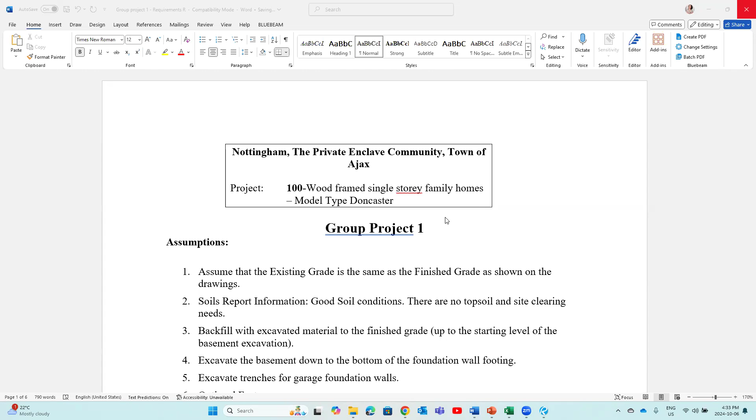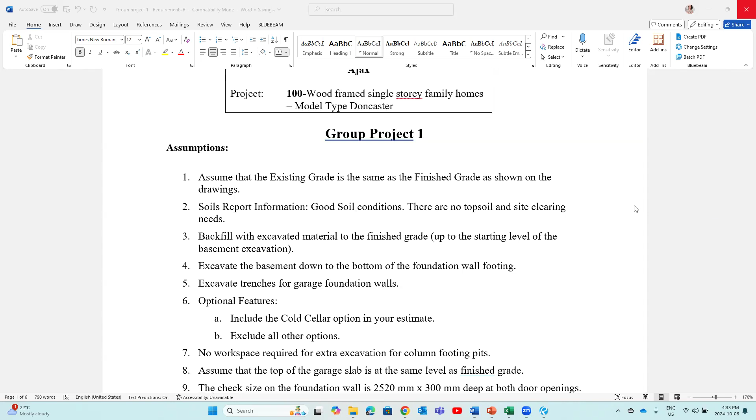The first thing you need to do is read the requirements for this group project number 1. If you go through the requirements, I have a lot of assumptions, extra information or additional information I give to you other than the set of drawings and construction notes. Also in the requirements for the project, I also give you the recap as well.

So those are the items you need to calculate quantities for. For example, excavation, right? We have 9 items you need to get the quantities for: excavation basement, trench excavation, excavate trench for garage step footings, then backfill, or whatever.

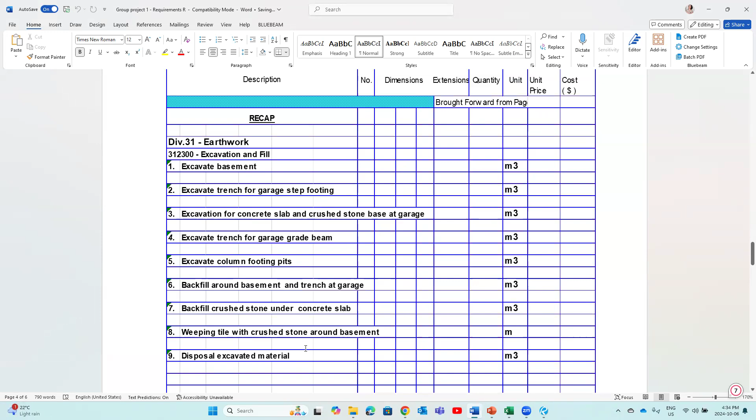So after you go through these requirements, the next thing you need to do is open the drawings. In this case, we don't have a separate specification, but we do have construction notes with the drawings. I believe you're already familiar with this Doncaster project. So the first thing you need to do is read the construction notes first.

You go through the construction notes and highlight the information you need for excavation. For example, those notes which are highlighted are related to the excavation work. Also, you need to highlight the information you need.

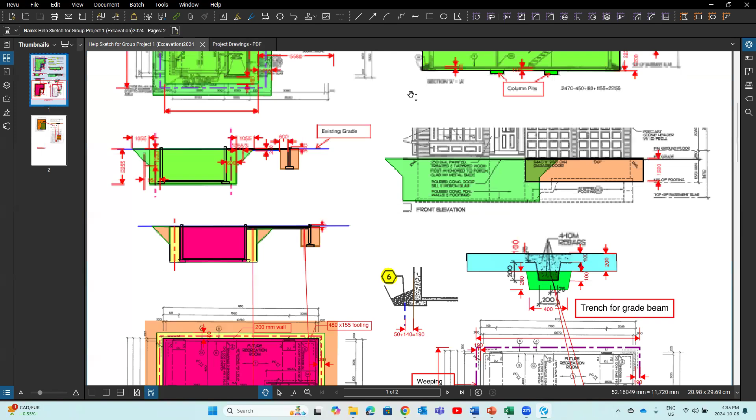For example, under construction notes, I read those notes and I highlight the size of the column footing, the size of the foundation wall, the size of the foundation footing underneath the foundation wall, and the thickness of the slab in the basement.

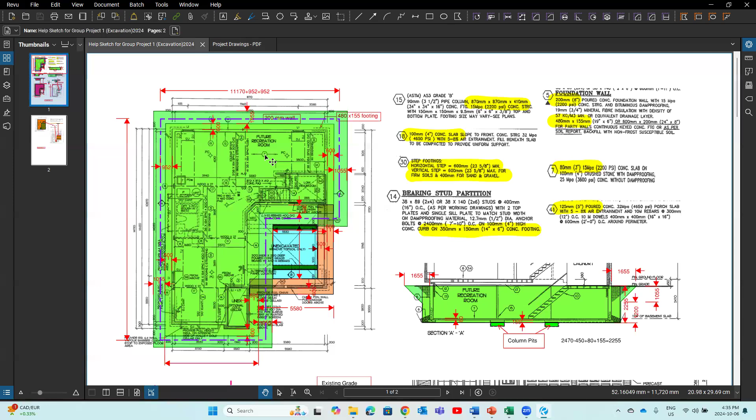That's number 7. You see number 7 here in the notes. See that, right? That's number 7 there. So that means this basement slab is 80 millimeter, the thickness of the concrete slab.

And this 18, note 18 is for 100 millimeter concrete slab. If you look at the drawing, the first floor plan, you see this note number 18. That means the thickness of the concrete slab in the garage is 100 millimeter. So that's the way how you read the construction notes.

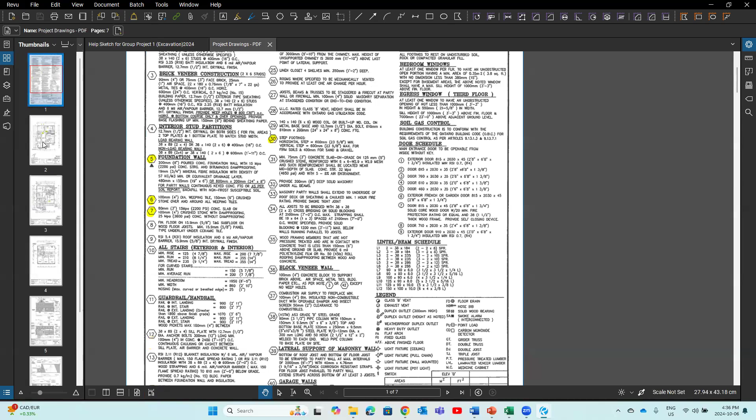And also you put the notes, you can highlight the information. Sometimes you can also transfer the information to the drawings. I would say, okay, under drawings, I'm going to write, for example here, the thickness of the wall. This thickness of wall here is 200 millimeter. I would put this information under drawings.

So next time I don't need to go back to read my notes. I'll write down my footing size, 480 by 155, that's this footing. I can use a different color as well. Here, side and front, and here, you see that's my footing. I want to say footing, I'll say foundation footing. The footing is this.

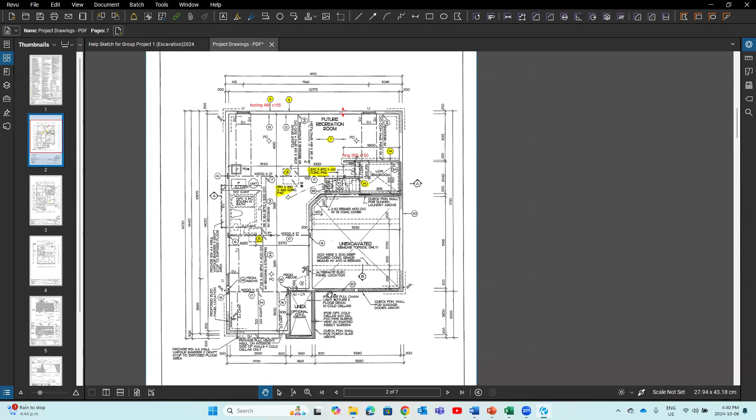That also means we need to dig a trench along this wall. A big basement excavation, dig a big hole for the basement, and for this wall, the garage wall, we are going to excavate a trench. It's very similar to the example I gave you in week 4. If you don't know how to do it, look at my example from week 4. It has a very detailed explanation of how we do the excavation in this kind of situation.

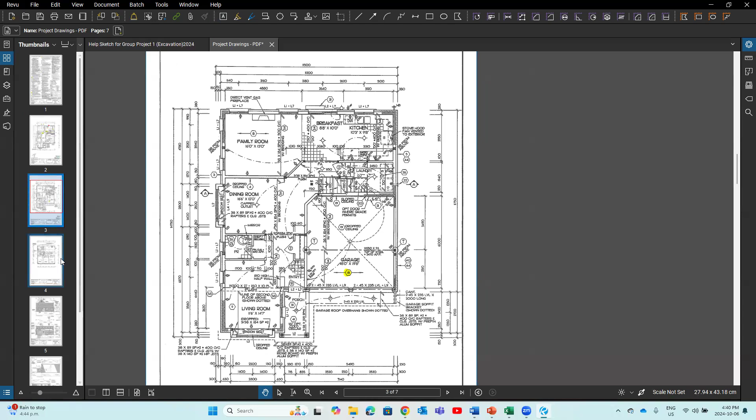So after we read this foundation plan, we need to go to the other floor plans, first floor, second floor, and then look at the elevation. When we look at the elevations for excavation, we pay more attention to the foundation.

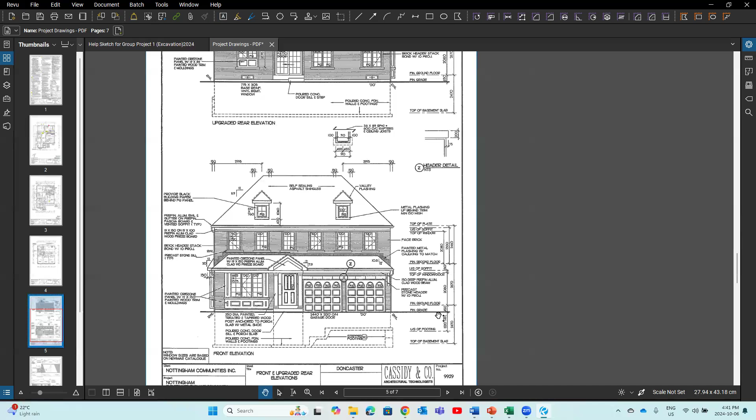If you look at this elevation, you'll see we have step footings here, two steps down. We should also see the notes for step footing, that's construction note number 30. And we should see the dimension from the finished ground floor to the top of the basement slab.

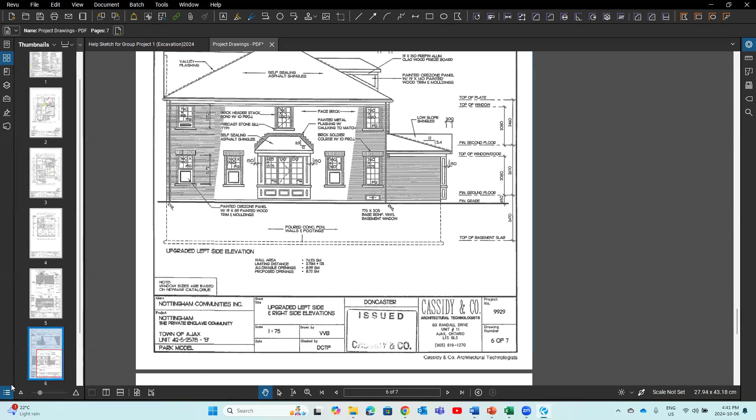After we go through this elevation, we should go to the cross section as well. On the cross section, we see the dimensions for the foundation wall, the height of the foundation wall, and we can refer to the notes for the size of the foundation wall and footing, column footing size, partition wall footing size. At this stage, we should know all the information related to them.

So after reading this, what you need to try to do is, in your mind, picture this in 3D. I'll give you some ideas about the 3D modeling to help you understand the 2D drawings. So after understanding the drawings, we try to visualize it in 3D.

So under the foundation plan, we see the windows, we'll say basement windows. That means when we build this foundation wall, we need to cut a recess, make a recess under the concrete foundation wall.

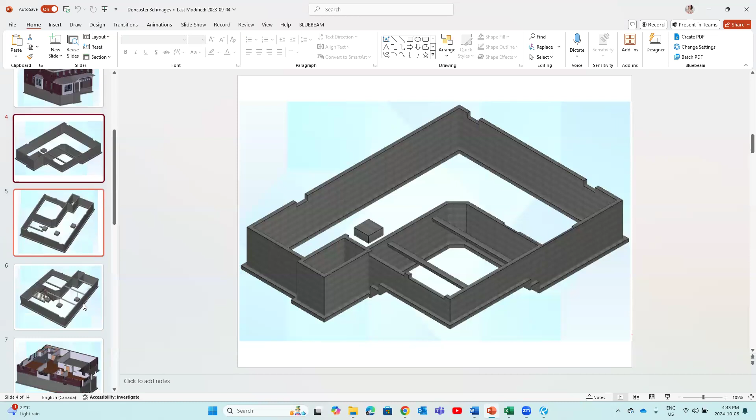Now you see this foundation wall along the garage. This is the garage, there's a foundation wall along it. See, this foundation wall is shorter than the basement foundation. And also we can see we have partition wall footing, we have 3 column footings, we have grade beams there.

So that means when we excavate the basement, the shape we are going to excavate is this, that's a big hole we need to dig. Then we dig a trench along here, and also we need to think about column footing pits as well. So this is how you can visualize it in 3D.

So after you understand this, now we are going to draw sketches to help identify the shape of the excavation and the size of the excavation. So now we are going to look at the 2D drawing and start to draw sketches using the section drawing, the cross section.

The first thing we need to find out is where is the existing grade. You see, this is the final grade or finished grade, but we don't know where the existing grade is. We also need to know the condition, the soil type or condition of the soil.

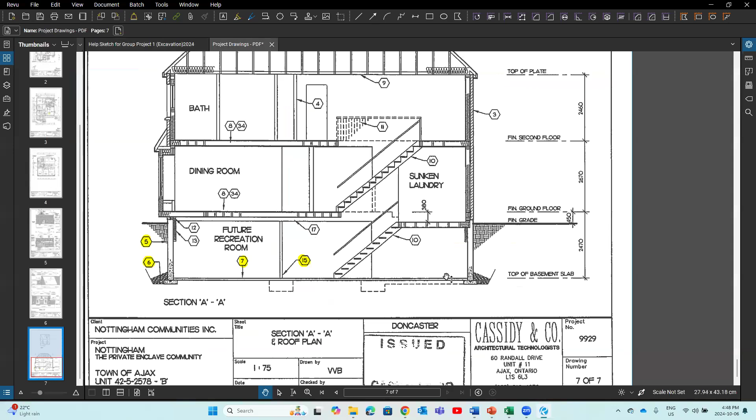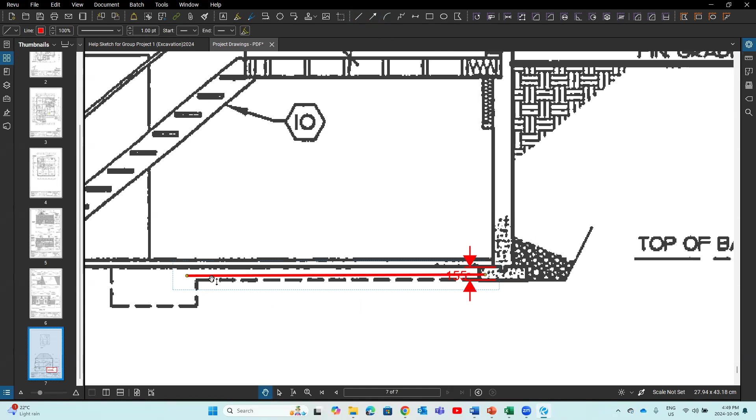That means the footing, you see, this footing size we know is 155. And the gravel here, if I draw that line, that would be around here. That's the gravel, that's the bottom of the gravel. And this dimension from there to there is 100. So the difference is 55 millimeter.

55 millimeter. So my assumption is, okay, let's excavate all the way to the bottom of the foundation wall footing, and we are going to make the thickness of the gravel from 100 millimeter to 155. That's my assumption. As a contractor, in real life, I'm going to decide this is the way I'm going to do the excavation.

I excavate the whole basement to the bottom of the footing. And the thickness of the gravel, instead of 100 millimeter, now would be 155. That is my assumption.

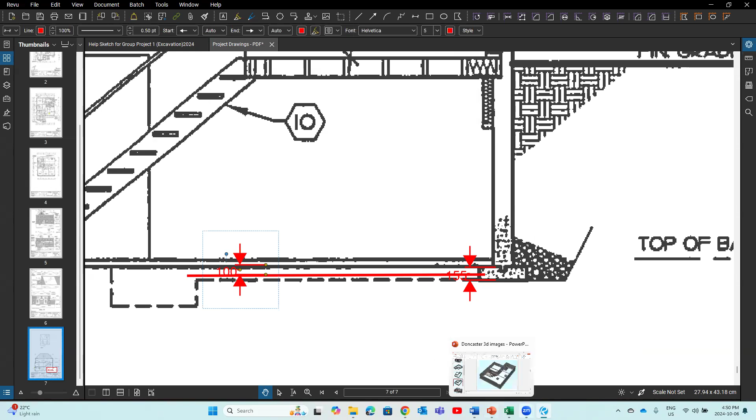So if you look at the notes, this assumption here, you see number 11. I said, assume there is a 155 millimeter thick crushed stone base under basement slab. Please replace 100 millimeter crushed stone with 155 millimeter crushed stone in construction note 7.

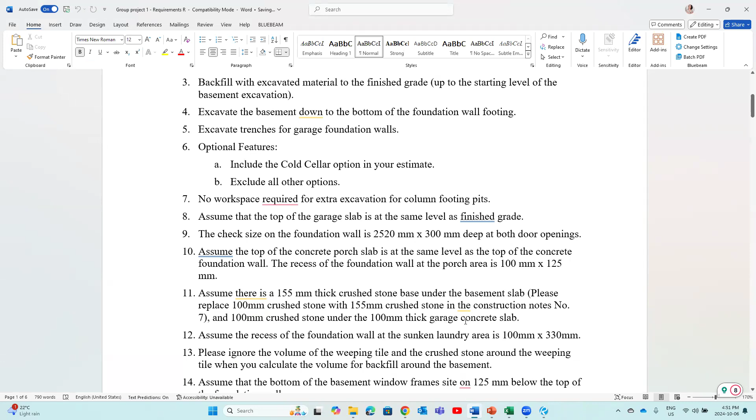And we also say, assume there is 100 millimeter crushed stone under the 100 millimeter thick garage concrete slab, because note 18 didn't mention what the thickness of the granular base underneath the concrete slab in the garage is. So I add this assumption.

So those are the extra information you need to pay attention to. Just read them, you will realize that.

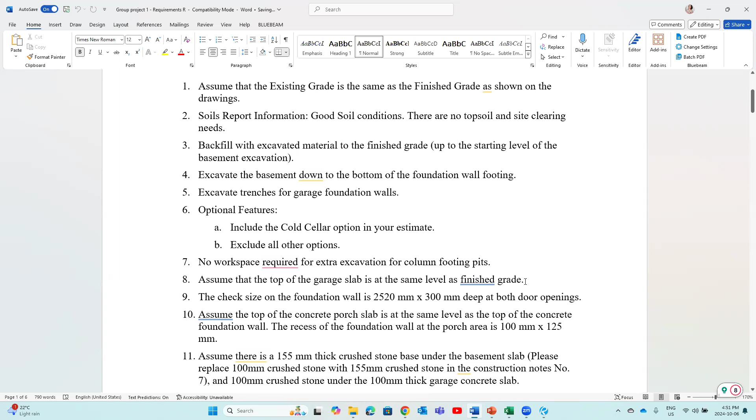Another assumption I say, pay attention to this. Assumption number 8, assume that the top of the garage slab is at the same level as the finished grade. That means the top of the garage slab is also at the same level with the existing grade. That's what you need to pay attention to.

After we know all that information, now we are going to start drawing sketches. As I said, we are going to first look at the cross section to draw a sketch. So the first line we are going to draw is where the existing grade is. We know existing grade is the same as the finished grade. So this is the existing grade, see this line. I'll make it a different color, maybe blue.

That's the existing grade. So from the existing grade, I'm going to excavate to the bottom of the foundation wall footing. So based on this, I can do my calculation and figure out what is the depth of basement excavation.

You see, I know this dimension from here, finished ground floor, to the top of the basement slab is 2470. To the existing grade, this dimension from there is 450. So I take this dimension, subtract 450, and get this dimension from there to there. After that, I need to add the thickness of the slab and the thickness of the foundation wall footing. That slab is 80 and the foundation wall footing is 155. So I get the depth of my basement excavation, 2255. That's how I get it.

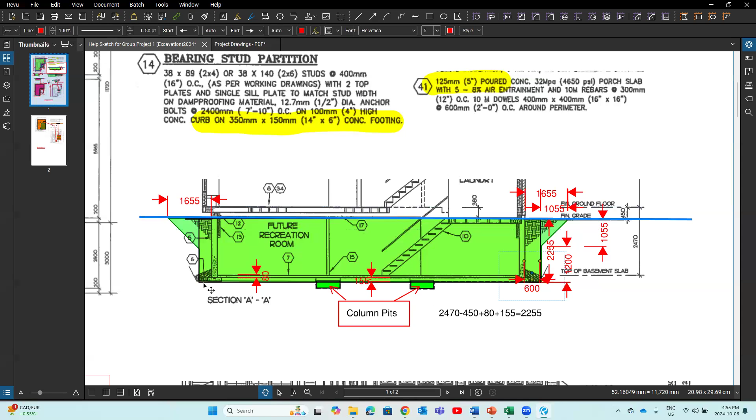We also have column footings here. That means after we excavate to the bottom of the foundation wall footing, we need to dig extra column pits for those column footings. The depth of the column pits should be the depth of the column footing, subtract 155. That will give us the depth of the column pits.

Now, how many? We can see that from the foundation plan, right? 3 of them. Of course they have different dimensions. Pay attention to the dimensions of those 3 column footings.

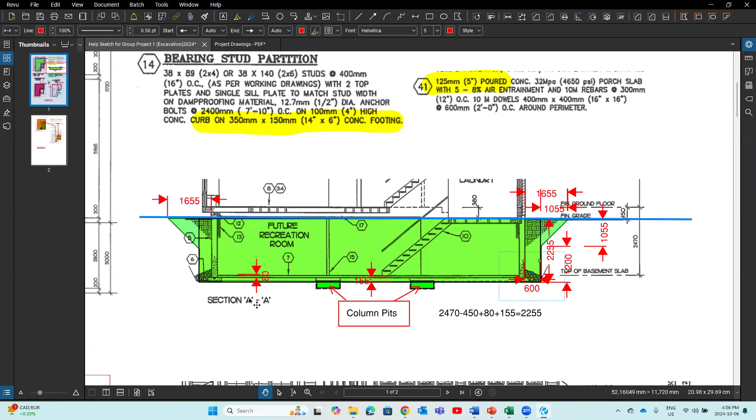After we finish this sketch, we are going to move this sketch to my foundation plan. In my example, I told you the easiest way to do the excavation is to separate the volume of the basement excavation into 2 parts. The first part, we assume we are going to cut straight down. Cut this, say, this green color.

We excavate the basement from the existing grade straight down to the bottom. Then we add the volume of this slope, which is a triangle. So if I want to draw this first part, cut it straight down from the ground, from the existing grade, that's this here. Cut it straight down like this.

The workspace, 600 millimeter, you see that's here, that's this. If I want to draw this here, this workspace, that's 600 millimeter. This is 600 millimeter from there to there.

On my foundation plan, that's this dimension here, from there to there, 600 millimeter. From outside of the foundation wall to this edge, 600 millimeter, and 600 millimeter there. So I can draw this part.

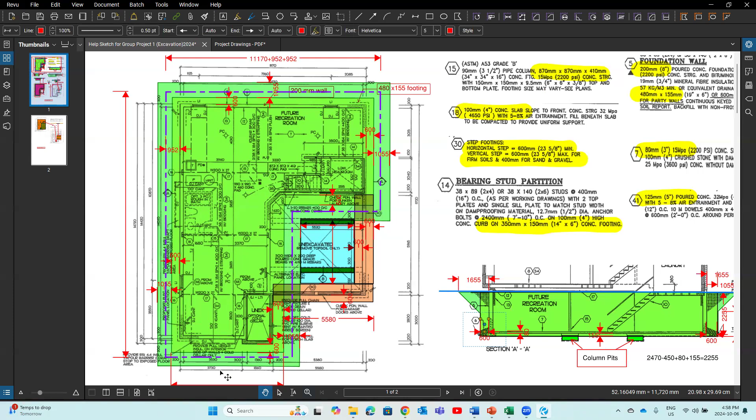So if we have a situation like this, we need to make sure we have this workspace from this foundation wall to the edge of the excavation. The back of the excavation is 600 millimeter, make sure this is 600 millimeter. Of course this part would be bigger than 600 millimeter, that's how much bigger, 300 millimeter more.

So that means this dimension, if we want to draw from here to there, that will be 900 millimeter. Pay attention to those kinds of small things. When we excavate a big basement, we use equipment, we don't want to make those setbacks, we always cut it straight.

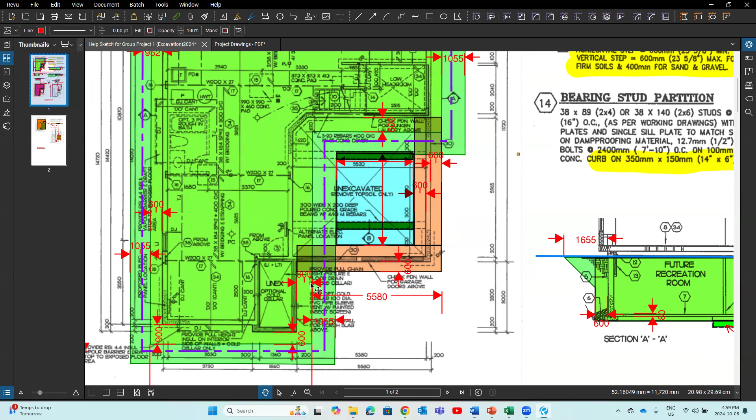So the same situation applies to this side. You see this wall here has a setback there. So we should base on this wall to decide what's the workspace, from this wall out 600 millimeter. So that's how we draw this first part of the excavation under the foundation plan.

And if we want to draw this slope, this triangle part, that's this color all the way around. Make sure you imagine this in 3D, it's all the way around, it's not only two triangles. That's what you need to visualize in your mind, it's a slope all the way around here.

Okay, if we can draw this under the foundation plan, now we can start to measure the quantities for basement excavation. Let's look at the first part here. Okay, first part.

We consider this slope the second part. First part, let's cut it straight down to the bottom of the foundation footing. So what would be the dimension for this? We want to get the area of this, based on the foundation plan. After we get the area, then we multiply by the depth, we should be able to get the volume for the first part.

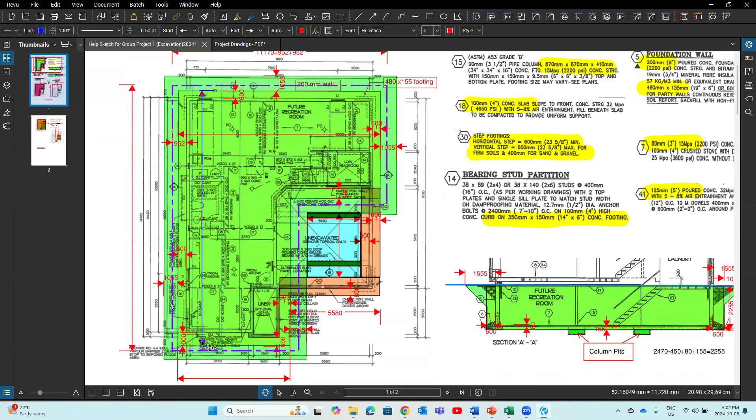So how do we get this dimension? We have this dimension here, from outside of the foundation wall to outside of the foundation wall. Take that dimension, we add 600 millimeter this side and 600 millimeter that side, we should be able to get this dimension. Same way, we can use the same method to calculate the dimension of this. That is the first part of basement excavation. Now we are going to look at the second part of the basement excavation.

If I draw the dimension here as well, this dimension is 1055. This is 600 millimeter. If I want to get the area of this triangle, I would take base, 1055, multiplied by the height, 1055, divided by 2. I get a cross-sectional area of this slope, which is the cross-sectional area of this triangle.

After I get the cross-sectional area of this triangle, which is the slope, I multiply by the length. We cannot see the length from the section drawing, but we should figure out the center line length on the foundation plan. When we talk about the length of the wall, we look at the center line - that's the length of that wall.

So same thing applies to this slope. The center line length of that slope is the length of that slope all the way around. So we are going to look at where the center line of this triangle is. If you have an engineering background you already know this - the gravity center of a triangle, from the base to this side, is 1/3 of this dimension.

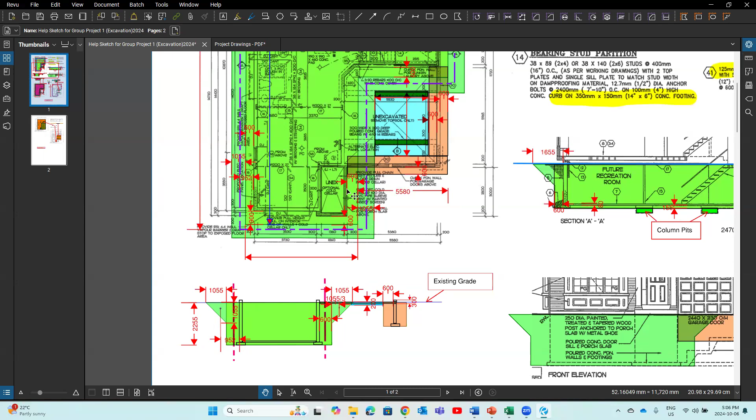If I draw this here, from there to there, that's 952. Understand that? That's this dimension here. So same thing all the way around this side, from there to there, 952, from there to there, 952.

So I can do this calculation. Same thing, I can get a dimension from there to there - take this dimension plus 952, 952 on this side. After I get these two dimensions, I can take this dimension plus this dimension, multiplied by 2. That would give me the perimeter.

The perimeter is a length, a 2D length - you need to think of it this way: you stand there, it goes all the way around, that's a travel distance, you go back to the same point.

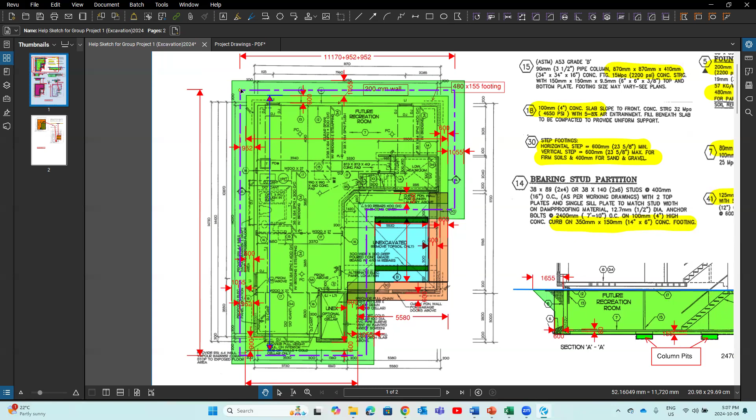After you get the length, you multiply by the cross section of this triangle, you get the volume. You add them together, you get the total volume of basement excavation.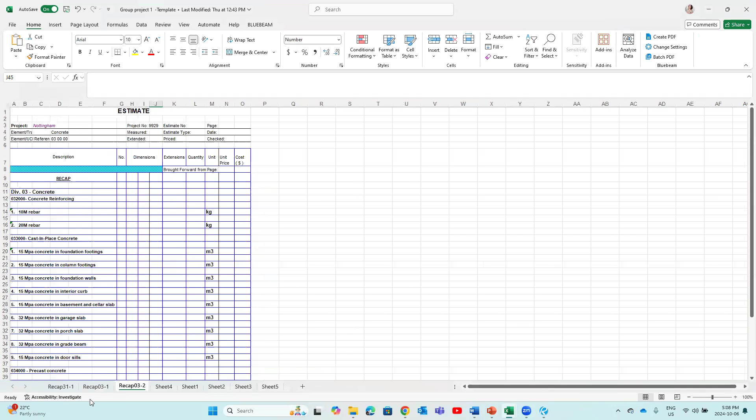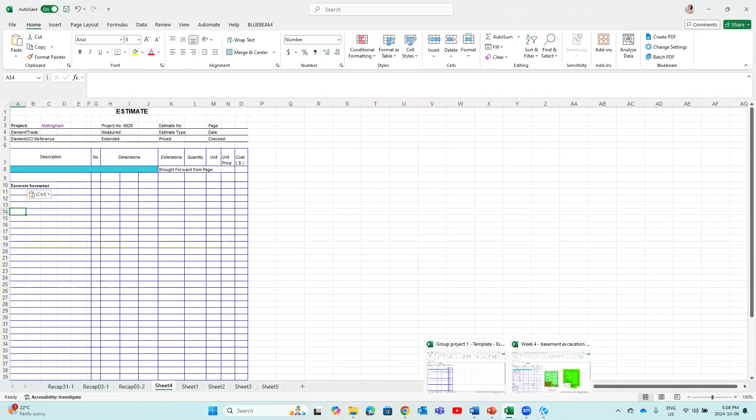So I gave you a template - this is my template, I gave you the recap. You can use this recap and template to do the calculation. You see, basement excavation, I'm going to calculate my first item. I copy this, go to my standard worksheets, paste this, basement excavation, and start to lay out my calculation.

How you lay out your calculation, use this example I give to you - it's an Excel file in week 4. You go to week 4 in D2L, you will be able to download this Excel file, and this is the way how you lay out your calculation in Excel. You can follow this - the drawing is slightly different, but the process should be the same.

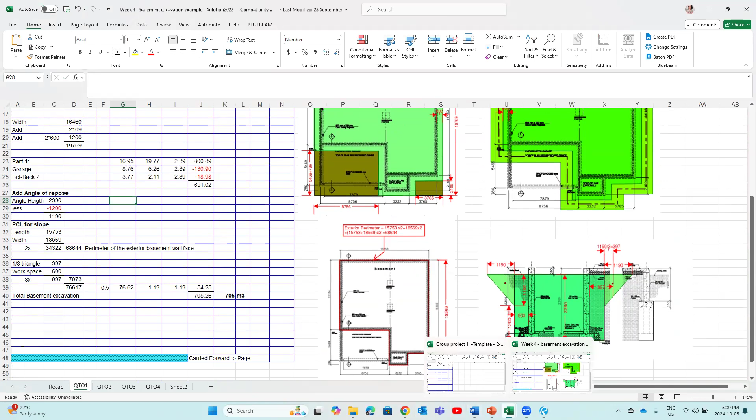That's how you start, because quite a few students asked me about this - what do we need to do. That's how you start: lay out your calculation, use the template I gave to you, and follow the example like this.

That's the first work item, basement excavation. Now we look at the second work item in the recap.

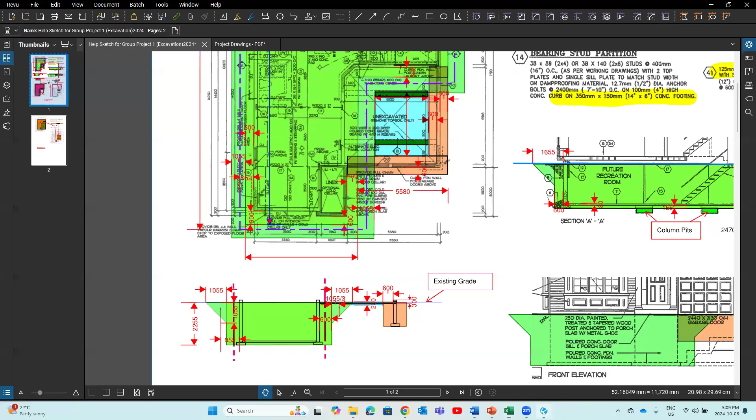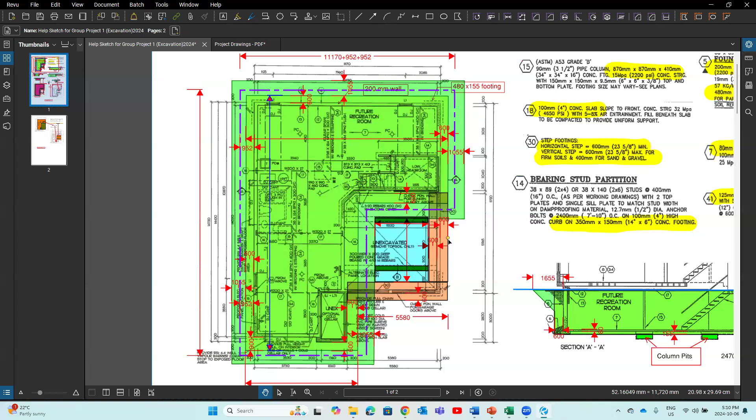Excavate trench for the garage step footings. That's this, the trench excavation. We would figure out what is the length of the trench. To simplify the calculation, we are going to use the length of the foundation wall as the length of this trench. Just figure out the dimension from there to there. Then you multiply by the width of the trench, depth of the trench. So if you look at the elevation, you should figure out what is the depth of the trench.

From the existing grade to the bottom of the footing, minimum is 1220. We are going to use this 1220, that's the depth of our trench. So I'm going to assume I'm going to excavate the trench straight like this.

We are going to ignore the step down footing, because when I excavate my basement, it's like this. Then if I calculate the trench excavation all the way to the foundation wall, take the length of the foundation wall like this, I actually double calculate the volume of this part. This volume I double calculate can balance this volume here. That's why I don't need to consider the step down footing, extra excavation to this step down footing. So that's a common practice, how we do things.

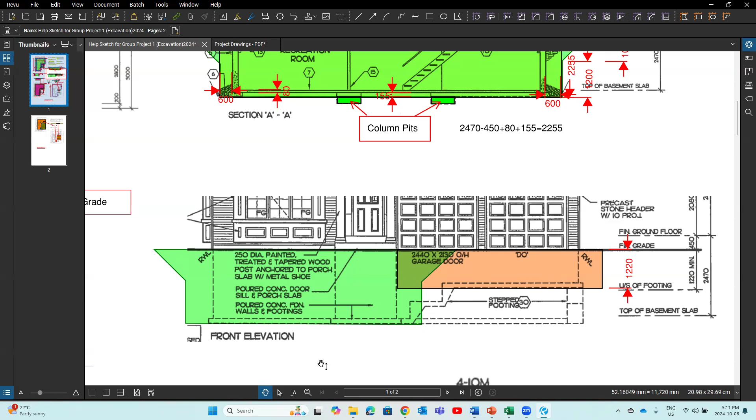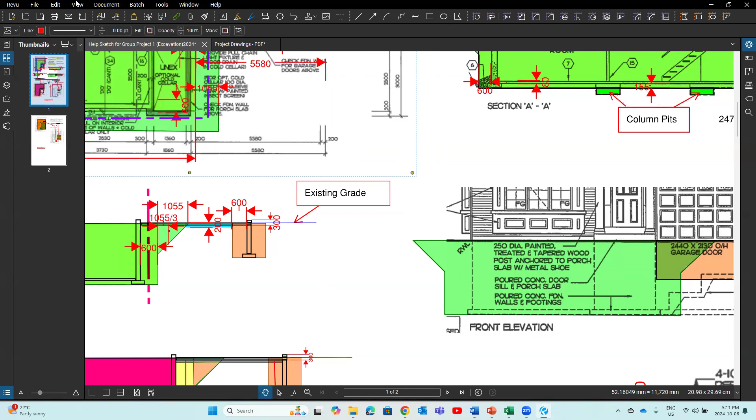So now I know the depth of the trench. How we get the width of the trench: we know the workspace is 600 millimeter. You take the 600 millimeter plus the thickness of the foundation wall plus another workspace, 600 millimeter. You should get the width of the trench. Width of the trench multiplied by depth of the trench, then multiply by the length of the trench, you get a volume.

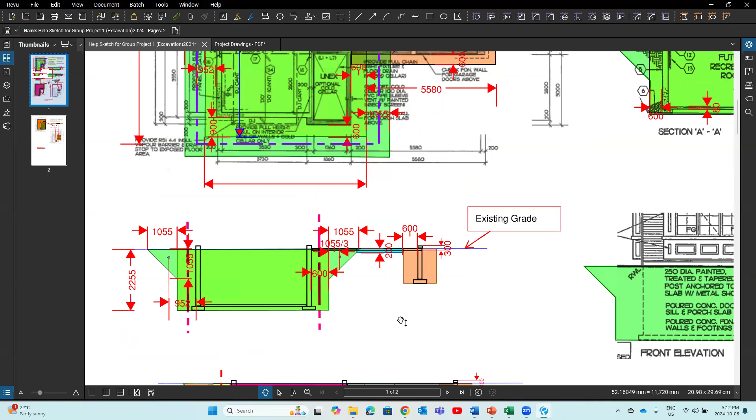That's item number 2. Item number 3, excavation for concrete slab and crushed stone base in garage. What's that? Can you see? If we draw a section, cut the section like this, make a cross section from here to there, from the basement all the way to the garage, like this.

What we need to pay attention to is the top of the concrete slab is at the same elevation with the finished grade. That means the top of the concrete slab is same level with the existing grade. And we read the construction notes, we know in the garage, the thickness of the slab is 100 millimeter. Underneath, we have 100 millimeter granular base. To build this slab, we need to remove the soil from the existing grade down.

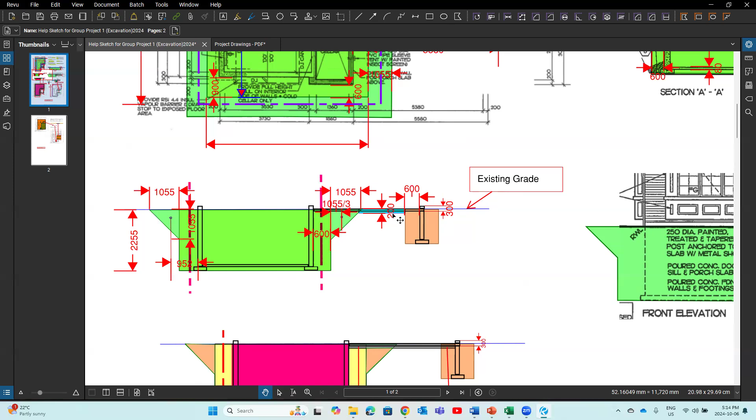200 millimeter. Understand that? To be able to put the gravel in and then pour the concrete. So if you understand this, that means in the garage, we need to excavate this, cut this, excavate from the existing grade 200 millimeter down. So that's this blue color. If we want to show this in our under foundation plan, that would be this part. See, this is the trench, when we dig the trench here. And when we excavate the basement, that's the slope, that's a slope up to there.

So when we calculate the area of this, this 200 millimeter thick soil we need to remove, that's this area. So you can take the interior dimension, 5580, you subtract this dimension, this side, you can figure out that dimension, based on this, plus the slope.

This is not exact 600 millimeters, slightly bigger than 600 millimeter. Then you subtract 600 millimeter this side, you will get this dimension. Same thing, you can get this dimension. After you get this dimension and this dimension, multiply them together, you get the area of this rectangle, blue rectangle. After that, you multiply by the thickness of the soil you need to remove, which is 200 millimeter. You get a volume of this. That is your item number 3.

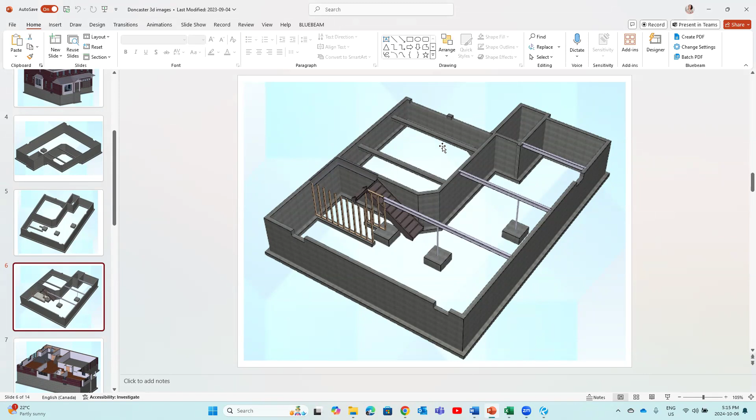Number 4, excavate trench for garage grade beam. So if you look at the drawing, and even if we look at here, see this, the 3D drawing, we have grade beam in the garage. If we look at the 2D drawing, where is that?

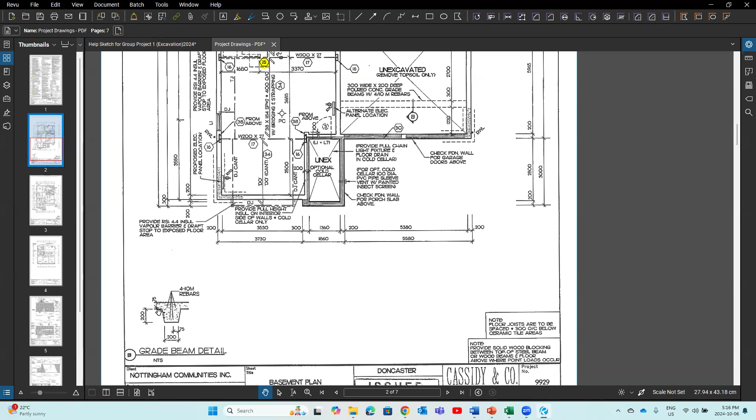That's this, right? You see grade beam, cross section B, section B, grade beam details, that's a size. 75 is a rebar, not the thickness of the slab. Thickness of the slab is 100 millimeter. So now I can draw a sketch to help me, right?

In the garage, we need to remove the soil, 200 millimeter soil, right? And this is my garage slab here. If I remove 200 millimeter soil, it goes down to here. But my grade beam is there, so I need to cut a small trench here.

So the trench, if you don't think about the gravel, the trench would be this 200 millimeter by 100 millimeter, right? That's at least this. But if we consider there's granular base underneath, 100 millimeter underneath, the trench size would be 400 millimeter by 100 millimeter. That would be the size of the trench.

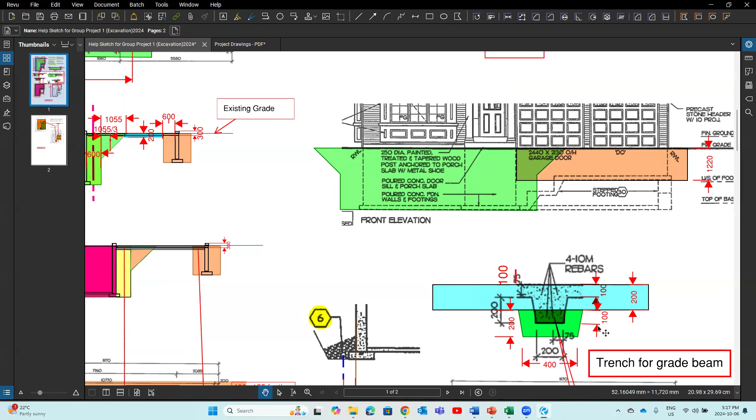Okay, if I draw that here, that's the length of the trench. If I draw it here, the length of the trench should be like this. Okay, that's the length of the trench. Understand that?

Okay, if we don't consider gravel, the size of the trench is this. If we consider gravel, the size of the trench is this. I remember in my in-person lecture, I didn't consider the gravel base, so I said you can use this trench size. That's fine, but if you look more accurately, we do have a gravel underneath, so the trench should be like this.

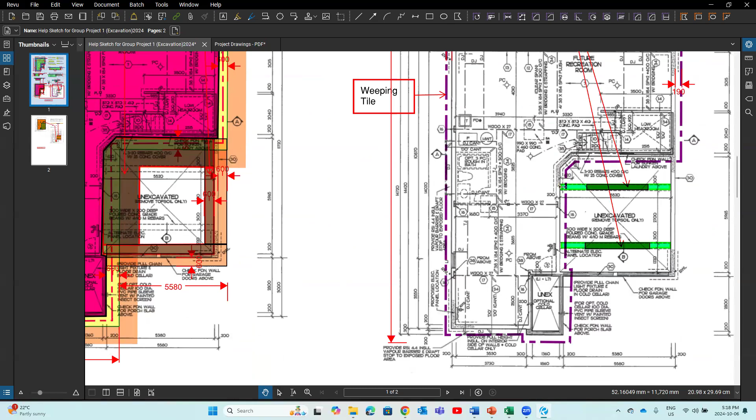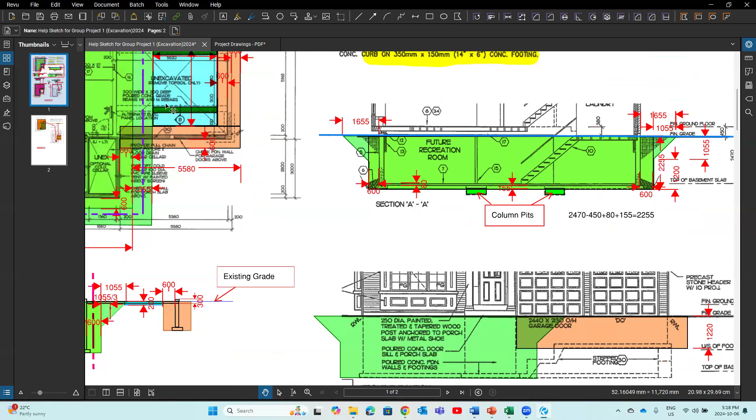That's the length. Lots of estimators, what they do, they take this trench length and multiply simply - instead, in real life, because it's a small item, it's fine. Some estimators would take this cross-sectional area multiplied by this length. You get a reasonable number, but for this assignment, more accurately, you take this dimension, multiply by this dimension, multiply by the length. Here you get the 100% correct number. If you get this one, this dimension multiplied by 100 millimeter, following the way I taught you in the lab class, that's fine too, I will mark both as right.

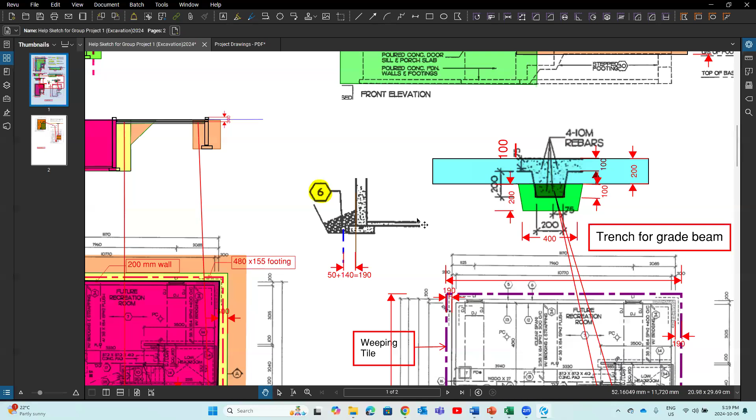If you consider gravel and if you don't consider gravel, both are okay for this assignment, but a better way is to consider there's gravel underneath. Okay, that is number 4.

Excavation for column pits - that should be easy to you guys. We already talked about depths of the pits, multiplied by this area of the column footing, multiplied by the depth, you get volume. Remember there are 3 of them. Okay, and that's item number 5.

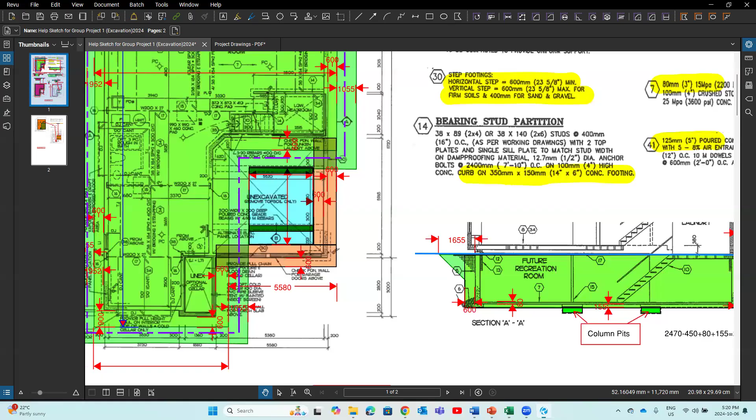Number 6, backfill around basement and the trench at garage. So you backfill excavated material to the basement and the trench. So when we calculate the backfill, the way we think about it should be like this.

After we excavate a big basement, a big hole underground, we are going to build this basement and the foundation wall for the garage. After we build that, we are going to backfill. For basement, it's only backfill outside. For this wall, it's backfill on 2 sides. If we look at this part, okay, basement backfill...

The easiest way for you to do the calculation is to take the total volume of excavation, subtract the volume occupied by the basement. This pink color, you will be able to get the volume for backfill. I think that is the easiest way.

Some students say, Miss, I want to do this - take the volume of this part, multiply by center line length of this. That's fine, but if you do that, pay attention to this here. You have extra backfill here, and you have a little bit extra backfill there. That's what you need to pay attention to.

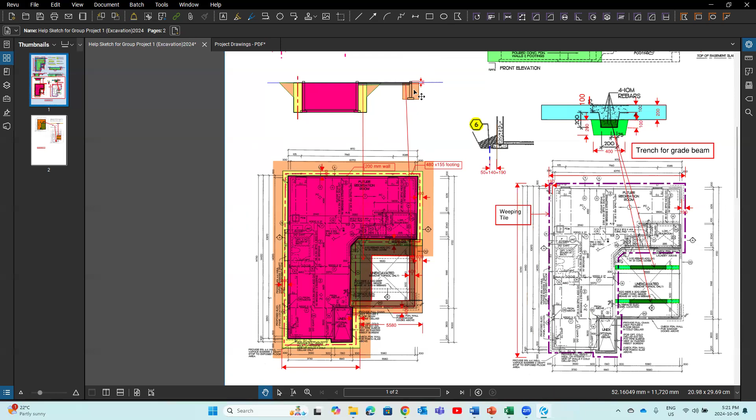So for trench backfill, you take the total volume of the excavation, subtract the volume occupied by footing and foundation wall in the trench, you get the backfill, right? So what you need to pay more attention to is here, you see here?

If we consider we backfill to the final grade, which is the existing grade, but we need to think about inside of the garage, we only backfill to the bottom of the gravel, which is to this level, and bottom of the gravel of this level. So if we calculate backfill up to the existing grade, we overestimate the volume, right?

We need to take that volume. We need to do some adjustment, where we take the total backfill volume to the existing grade at this level. Then we need to subtract the volume of this part and the volume of this part, only one side.

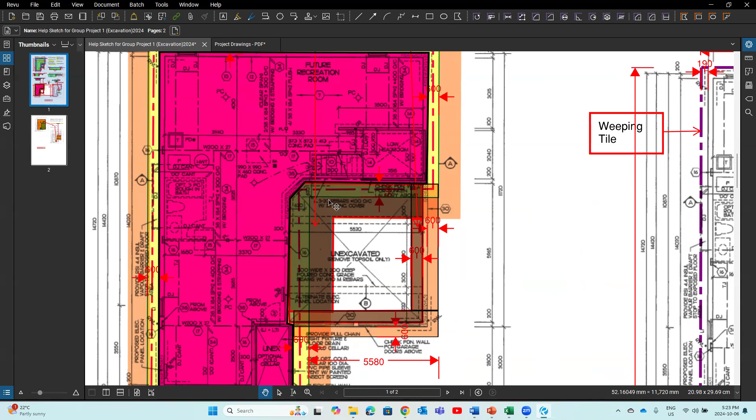So if I show this, okay, what I'd like you to do is not just look at my sketches. Try to draw your own sketch. If I highlight that, that should be this volume. I need to subtract, right? So you should be able to figure out the dimensions for this part.

Where we get the dimension, when we do the excavation, we already know the dimension for this part. That's what you need to subtract. Okay, that is number 6, backfill around the basement and trench at the garage.

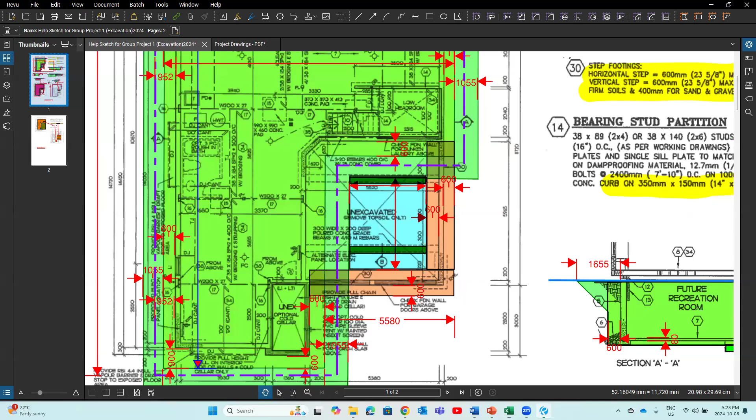Now item 7, backfill crushed stone under the concrete slab. So if I draw that backfill, if I highlight that and draw a sketch, highlighting this underneath of the basement, basement slab, I have crushed stone or gravel here. It's from inside of footing to inside of footing.

For the garage, inside of garage, which is from the foundation wall to the foundation wall - that's what you need to pay attention to. So if I highlight this, that's what I show on the section drawing.

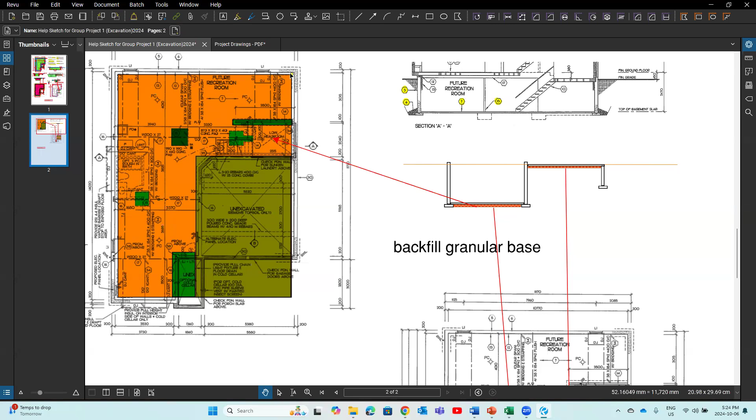If I want to show this on the foundation plan, that's this - inside of footing to inside of footing. So I can highlight this, you see this orange color. What I can do is take this dimension, subtract the dimension from outside of the wall to the inside of the footing, and I subtract that dimension here. I will be able to get my dimension from this point all the way to that point.

I should get this dimension. Same thing, I do this and get another dimension. Say this dimension, I have one there. I get this dimension. I also take this dimension and subtract this dimension here, outside the foundation wall to the inside of footing. I get this dimension.

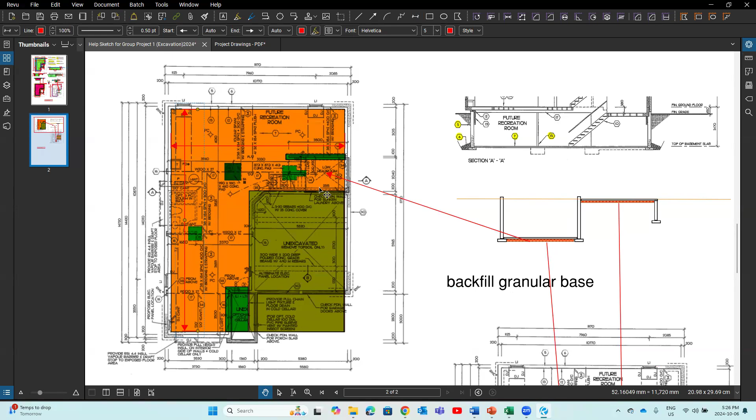I multiply these two dimensions to get the area of this big rectangle. Then I subtract this rectangle and I will be able to get my area. Then I multiply by the thickness of my granular base, 100, and get the volume. After that, I need to think about if I have concrete column footings, foundation or partition wall footings - I don't have the gravel there, so you need to subtract that volume.

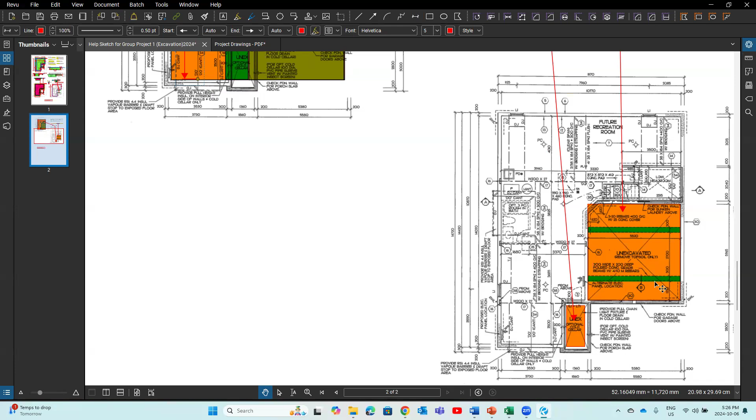So for the garage, gravel and cold cellar, that's how it looks. In the garage, what you do is take this area, inside of the wall to inside of the wall, and calculate the area. You also need to think about subtracting the volume occupied by the grade beam. That's what you need to pay attention to. That is item number 7, 8.

Weeping tile with crushed stone around the basement. We calculate the weeping tile by length in meters. So we look at the drawing. You see weeping tile - we can figure out from there it's right at the outside of the foundation wall footing. So we can figure out from center of the weeping tile to the outside of the footing is half of 100 millimeters, which is 50.

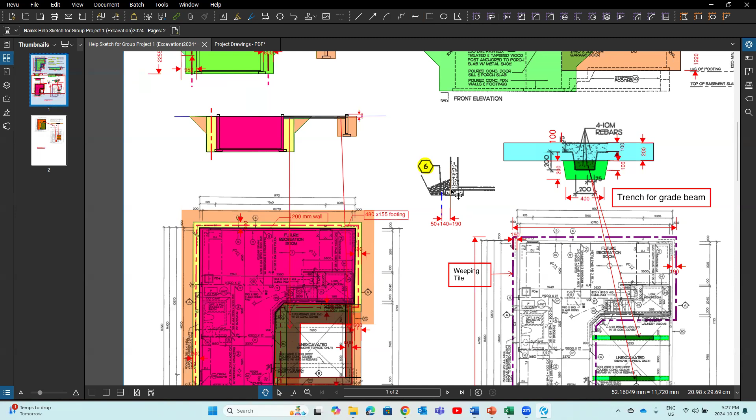Plus footing projection of 140, we get 190. That is from outside of the foundation to the center of the weeping tile. So if we draw this center line of the weeping tile under the foundation plan, it would look like this. If we could draw this, now we can get this dimension, and this dimension - multiply them together, add them together, multiply by 2, we get the perimeter.

Understand this? That's the length for the weeping tile. That's the way how we should think. I have the help sketch on D2L, so you can refer to that.

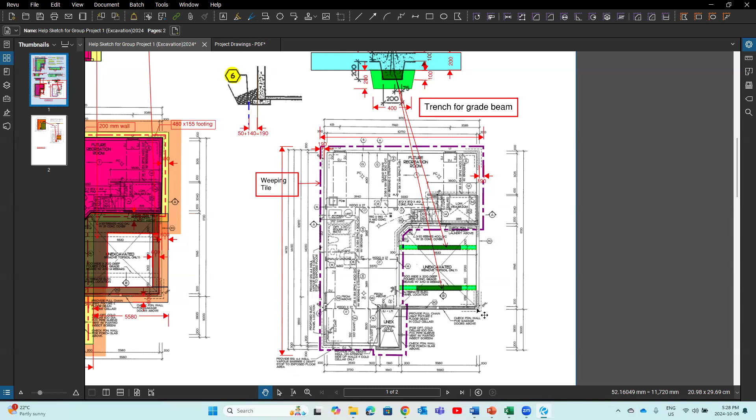So the last work item is disposal of excavated material. What you need to think about is the total volume of excavation, including basement excavation, trench excavation, extra excavation at the garage, the small trench for the grade beam, and excavation for footing pits.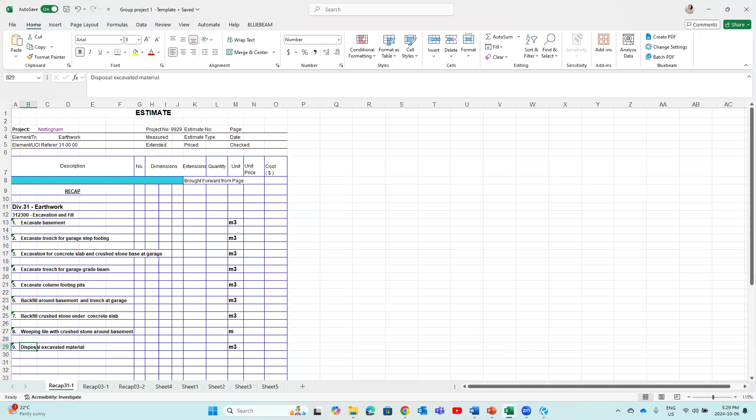The total volume of excavation, subtract the volume for backfill, which is using earth from the excavation to backfill. You take the total volume of excavation, subtract the total volume for backfill, and you will be able to get the volume for disposal. Those are the surplus earth remaining on the site that you need to remove. Okay, that is this video about basement excavation.